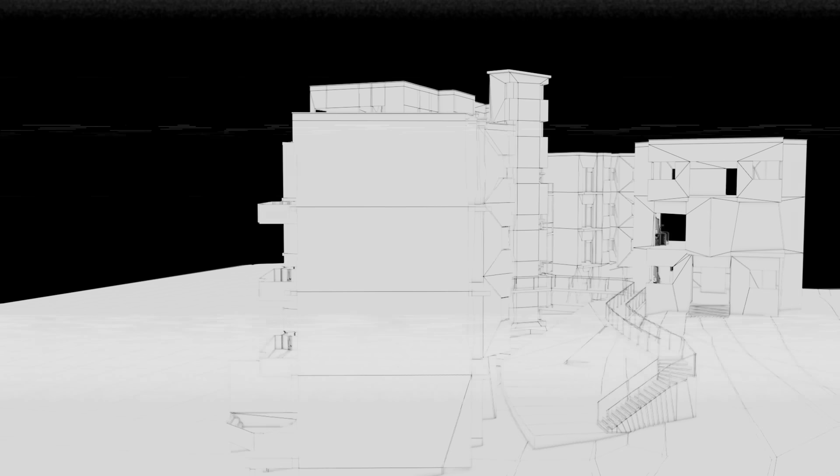I bought a plot of land many years ago for which I have ambitious plans. I've been on a property development journey ever since. Today I'm going to share each stage of the process, bringing us up to present day. But to do that, we need to go back to the very start.

I was born and raised in the UK. My family is St. Lucian. St. Lucia is a Caribbean island located between the Caribbean Sea and the North Atlantic Ocean. The capital is Castries and the population is currently 180,000. It's a member of the British Commonwealth and gained independence on the 22nd of February 1979.

Growing up, I was fortunate enough to visit St. Lucia many times as my mum wanted me to know where I was from and my family. I've been obsessed with construction and engineering my entire life, and my trips to St. Lucia were no different. I'd always try and work with my uncles in construction, agriculture, and haulage.

I started my construction business in 2006 in the UK, and in 2007, on a trip to St. Lucia, I inquired about land in the north of the island. Through a family friend, I was introduced to a gentleman who was selling this 1.7 acre plot you can see on my right, which is located in Bellevue Cap.

At the time, I had to stretch myself, but I managed to secure the plot for £120,000, which I paid for with a mixture of a deposit and a small loan. I wanted to pay back the loan, and my main focus was my business in the UK.

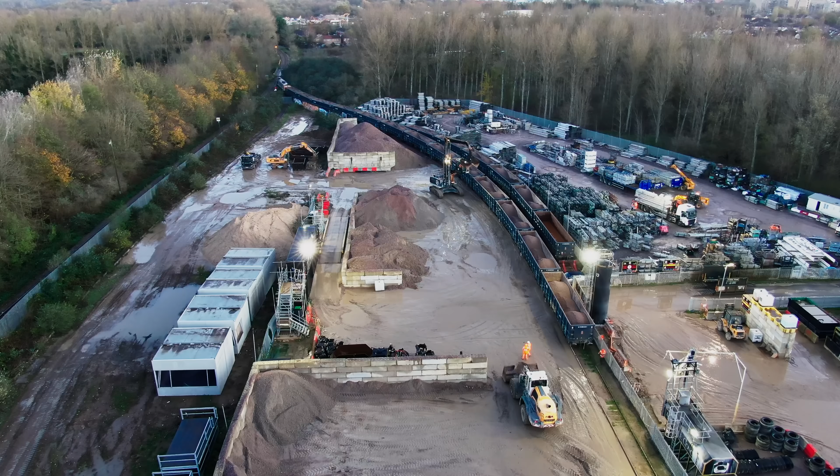So for a number of years, there were no developments here.

In 2009, the design process started, and there were two factors I had to acknowledge and take into account. Number one, the site isn't very big, and two, most importantly, it isn't seafront. So there was only one logical way I saw I could use the site to its full potential, and that was to get it as high as possible in order to create more units and give each of them a view of the sea. My construction experience is based on what I've learned in the UK.

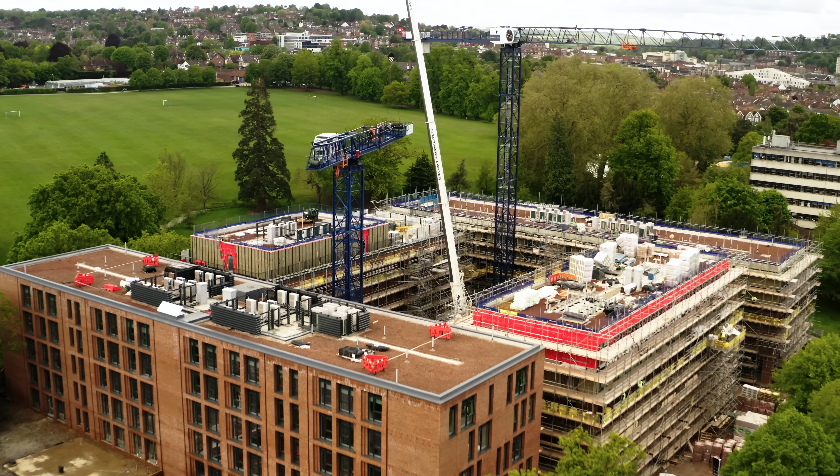But when building in the Caribbean, you need to take into account other factors which I didn't previously consider: storms, heat, sea blast. This is where the wind takes the salt from the sea and blows it inland and it rusts metal. The way around this is to specify stainless steel fixtures and fittings.

And finally, utilities. Unfortunately, in St. Lucia, from time to time, there are power cuts. We need to consider this in the build process and for the final homes.

I love concrete, I'm sorry, I can't help it, I do. And from day one, my concept for the development was modern and minimalist. I wanted to achieve this with open plan living spaces and white rendered walls, which would not be in keeping with the local architecture, which was colonial.

Rather than work against the terrain, it was decided that it would be easier to use the existing rock base and the levels of the land.

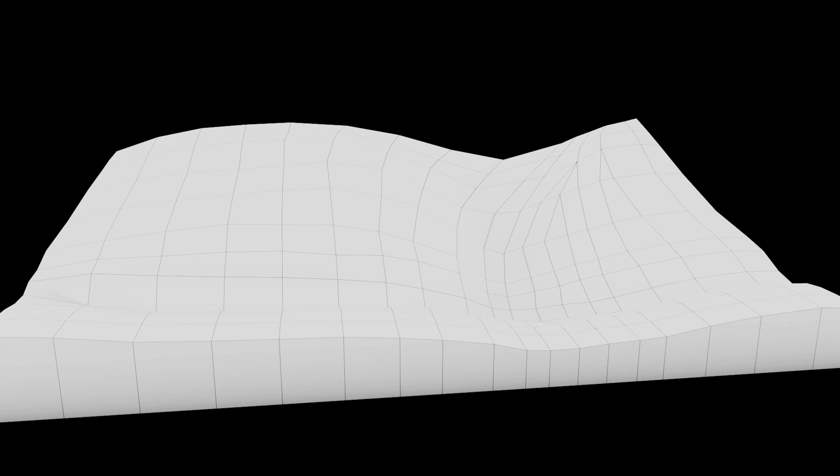I have always tried to convince my clients not to go with their crazy ideas, which cost a fortune to implement structurally. But this is my build. And against the advice of my team, in some areas, I decided on a stacked cube concept, which on each new level changed orientation.

It wasn't practical to do this in living areas, but we would implement it where we could with staircases and non-residential buildings. In my head, I had a clear vision for the residences, but the site itself needed a lot of manipulation to achieve the aspirations of the end product.

Now, when it came to the stacked cubes, I did not go with the recommendation of my team, but when it came to the lay of the land, I did take their recommendation. This is what I thought was required for each apartment.

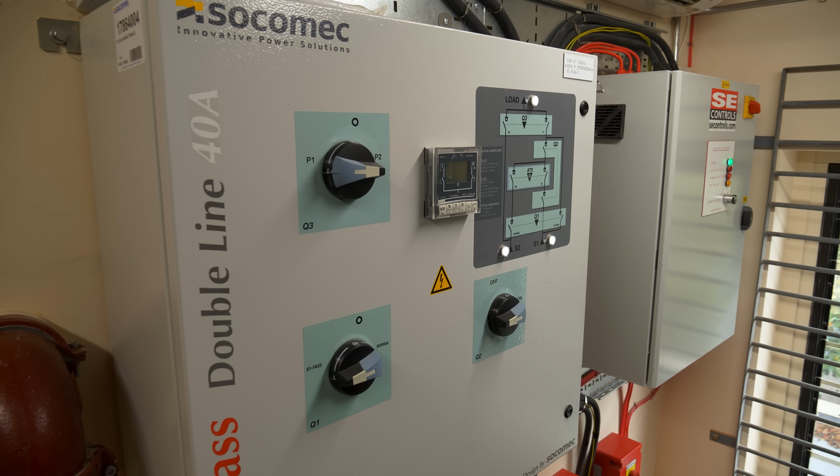Spacious rooms, high ceilings, and a light color palette give people a feel of space in a hot climate. Outdoor space and balconies, plenty of large windows and doors to let natural light in, a swimming pool, fully fitted state-of-the-art kitchens, luxury bathrooms, climate control, home automation, security, allocated parking, access to fitness and well-being facilities, backup power on demand in case of a power cut, and a concierge.

I've always wanted a home in St. Lucia, so I incorporated one within the development for myself and my family. With all this in mind, I approached a local architect and we began the design process, which went through a number of stages.

The first draft for the proposed layout had a reception building, 2 3-level apartment buildings, my home (the triangular-shaped building on the right), and a fitness and well-being centre with communal swimming pool, which was at the lowest point of the site.

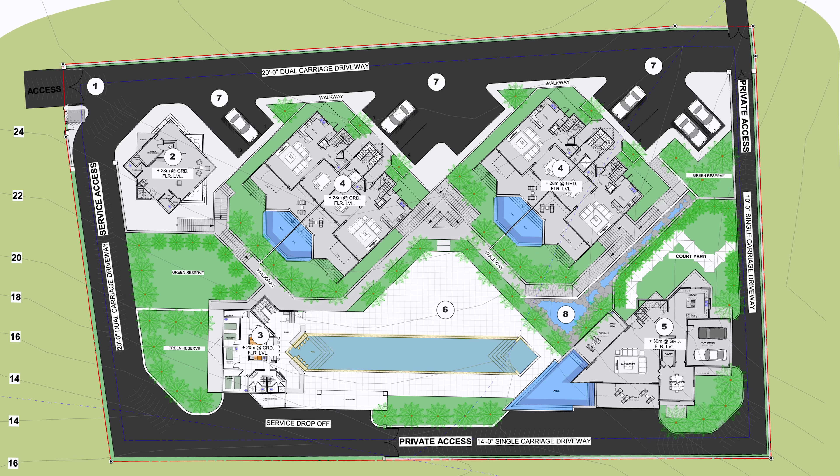To tackle the significant ground level differences, we used large retaining walls which doubled up as low-maintenance urban gardens. The apartment buildings were made of split-level townhouses on the ground and first floor, side by side, and one apartment on the second floor which sat over their entire footprint.

All the units had private pools, which were angled to have a view of the sea. In total, there were 4 townhouses, 2 apartments, my home, wellness facilities, and a reception building.

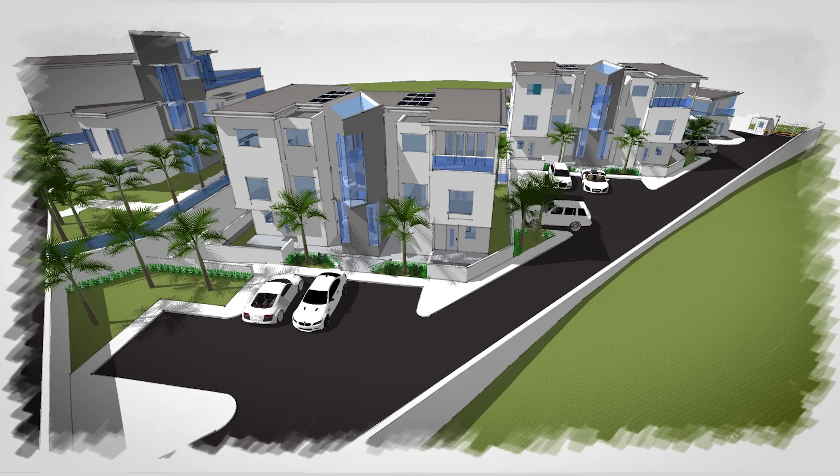Over time, we reviewed the proposed plans, and after a while, realized it wasn't the best use of space. There weren't enough apartments, my personal residence took up too much of the site, and the retaining walls would be extremely expensive to construct and maintain.

The wellness building would need to attract members from outside the development to sustain itself due to its size, and it simply wasn't high enough to capture the stunning views of the sea.

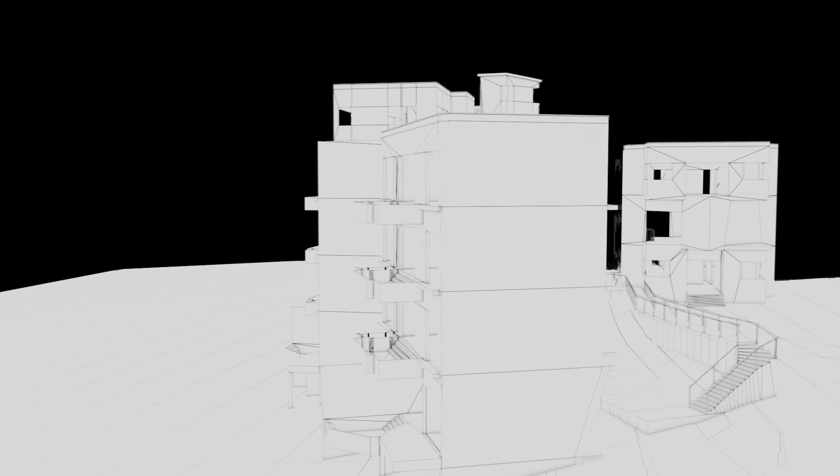So we went back to the drawing board in an attempt to fully utilize the potential of the site by deciding on the end goal and then reverse engineering to determine how we would achieve it.

We opted for 3 apartment complexes side by side with a mixture of units with floor plans which could be replicated and combined throughout the development.

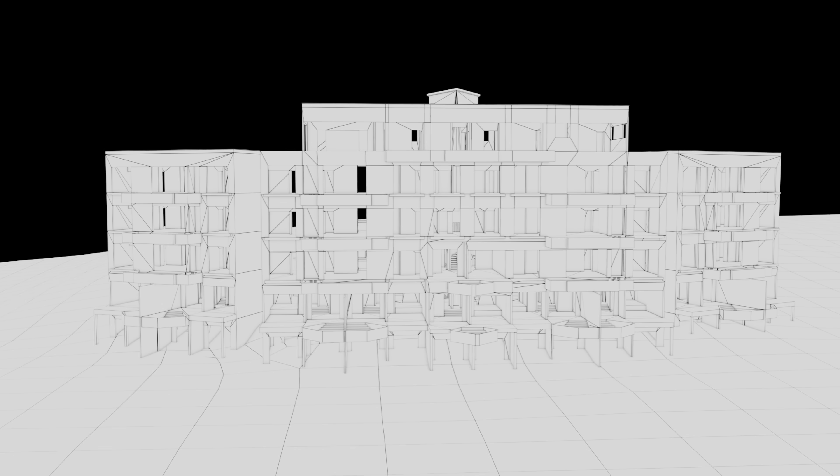The central building was 6 levels and the units either side 5 levels. This enabled shared structural walls to run through the multiple levels and save on costs, which was needed, as all the apartments, irrespective of their floor level, had private swimming pools.

Working with the natural slopes on the site, we accepted that the access roads would wind to ascend and descend, sort of like going for a nice drive on a mountainside.

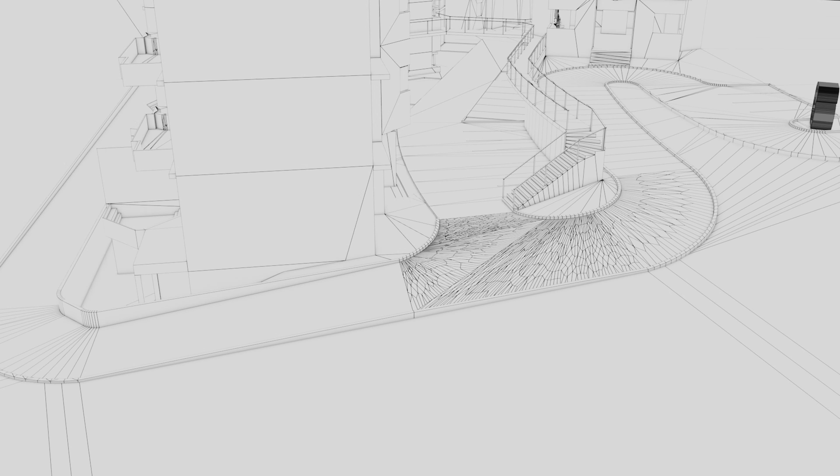I wanted to create an environment where everybody felt safe, supported, and had everything they'd expect from a luxury resort. So, inspired by the gated community concept, we put an 8-foot wall around the entire site, security gates, CCTV, a guardhouse, and a 3-level reception and fitness building.

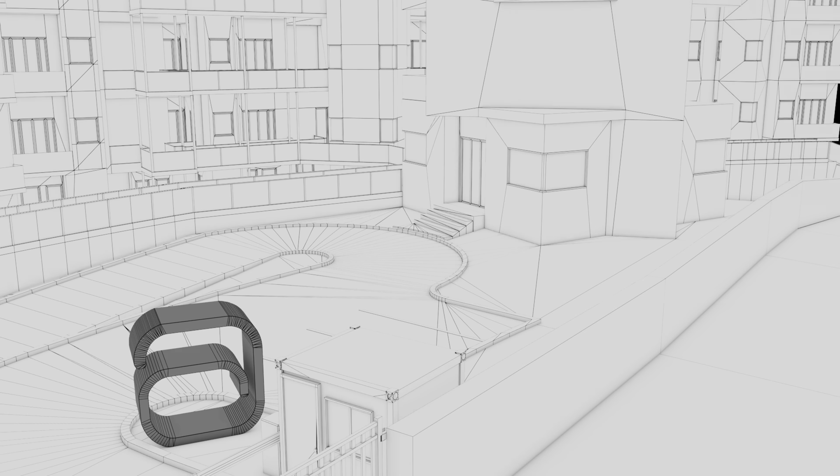It took time to get it right, but as I was self-funding this entire design process and had priorities elsewhere, the project wasn't time sensitive.

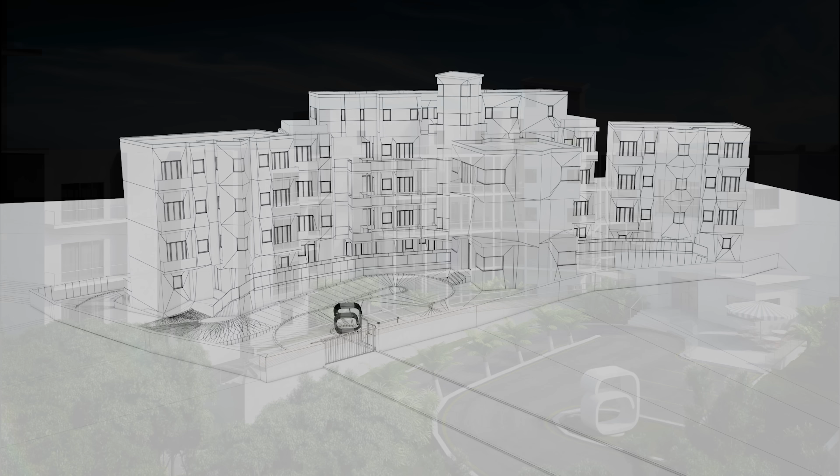Once the layouts were confirmed, the internal specification could take place. We went for modern lighting, large format tiles internally and externally, textured walls, and bespoke timber cabinetry.

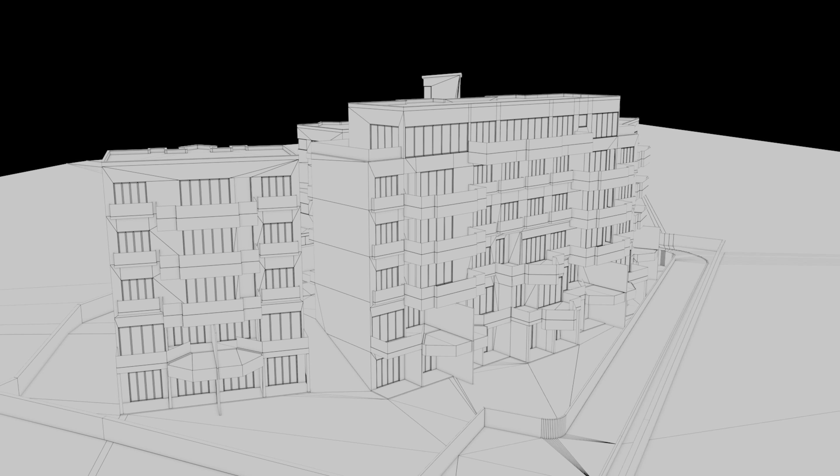At the end of the design phase, we had a scheme of 23 units. This was made up firstly, on the ground floor, of duplex townhouses, each 1,850 square foot with a flipped orientation.

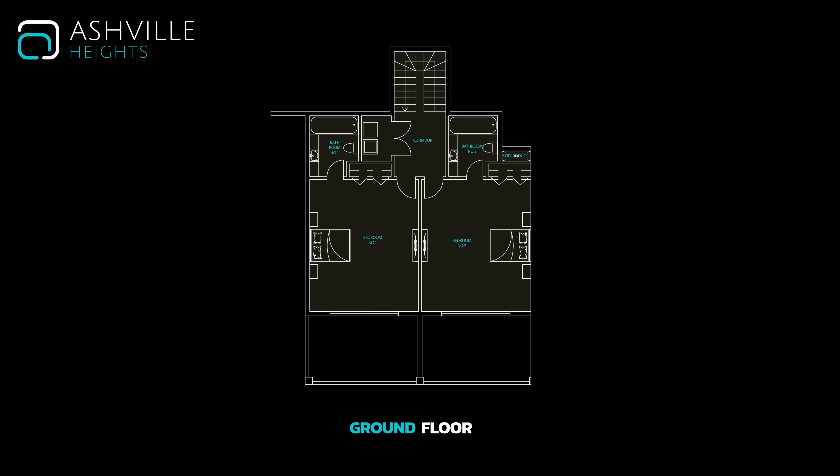On the ground floor, we had the bedrooms, and on the first floor, we had the living area and swimming pools, ensuring they had a view of the sea. Next, we had the 3-bedroom, 4-bathroom units, each 2,150 square foot. Then we had 4-bedroom, 5-bathroom units, which were 2,600 square foot.

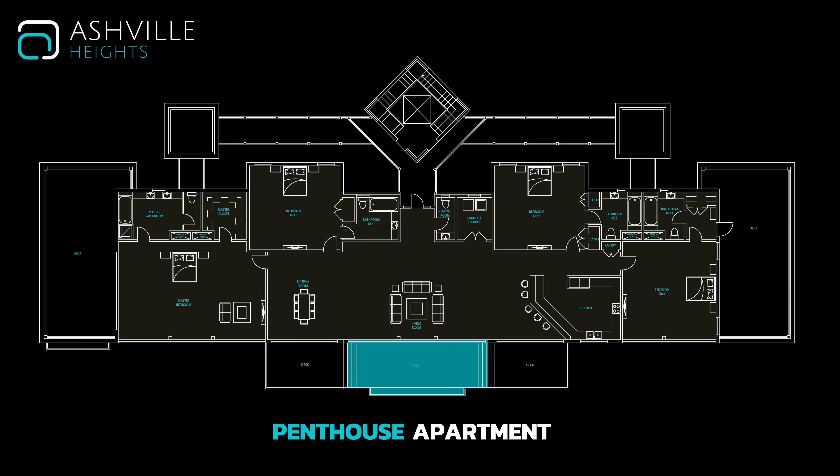And lastly, a 3,150 square foot, 4-bedroom, 5-bathroom, one-of-a-kind penthouse. And this, of course, was mine.

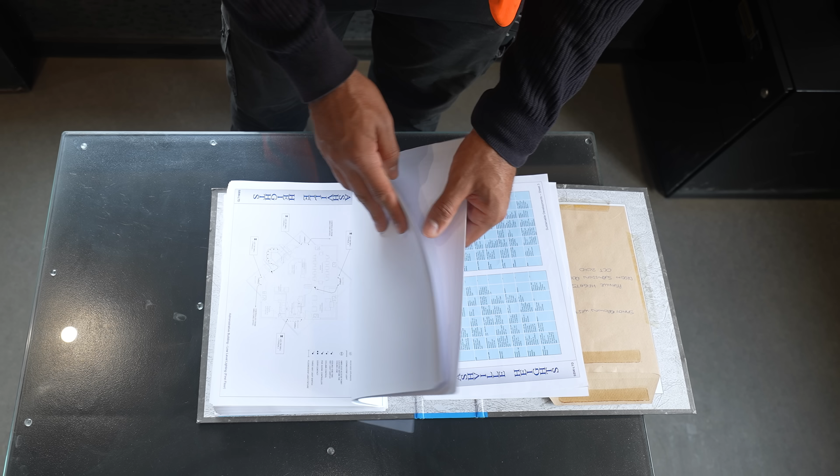My experience in the UK with planning did come in useful, but my team advised me on the finer details. We compiled a planning submission with architectural drawings, structural calculations and drawings, full mechanical and electrical plans, a fire risk management plan, and documentation describing how the site would impact the immediate space surrounding the proposed development.

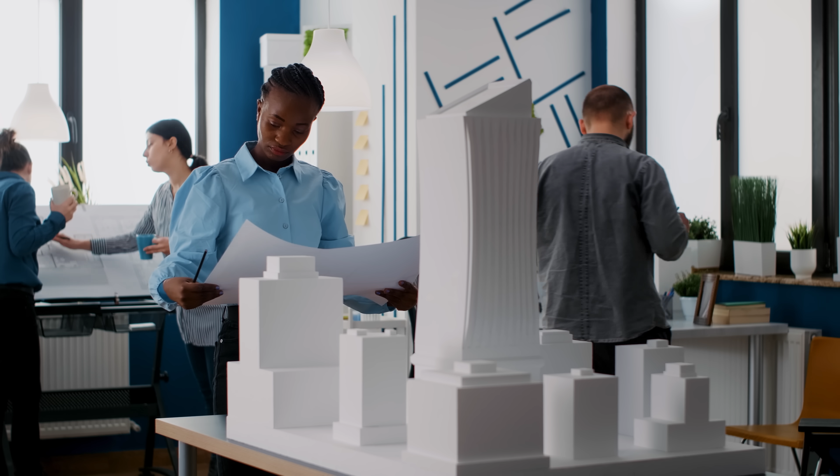Ordinarily, you would not submit this level of detail and information for planning. However, we foresaw this unprecedented development raising a lot of eyebrows and questions, so we approached with a preemptive strategy. After a not too painful planning process, which included a meeting with a government official to discuss the plans in depth, we got planning for the site in July of 2012.

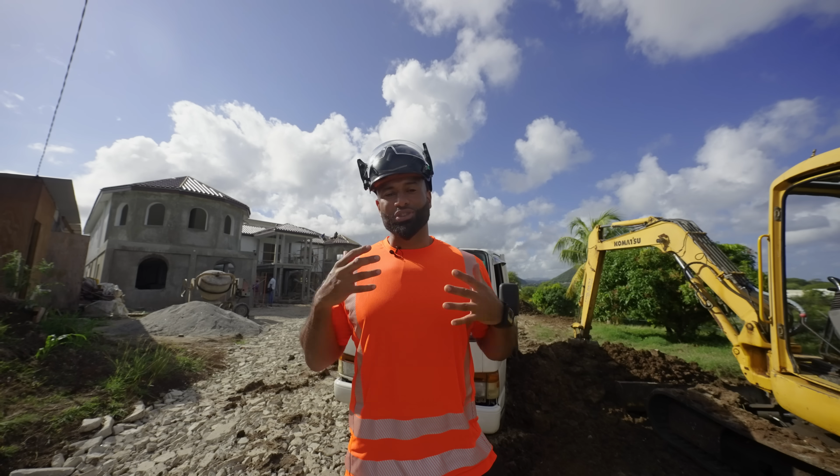It was now time to look at the build costs, and I decided a locally based quantity surveyor would be the best option. I waited till this stage to price the build because I feared that while going through the planning process there could be changes. This can happen as the planning department and local residents may have recommendations which the site needs to accommodate.

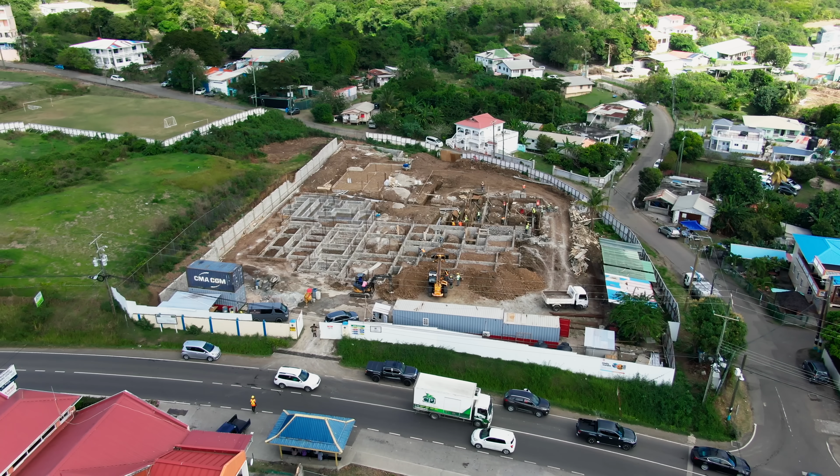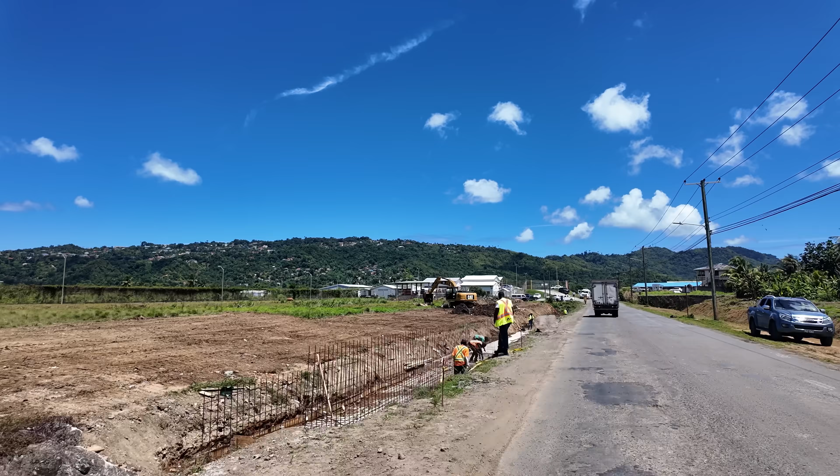With planning approved and a cost plan, it was time to do market research. We needed to identify who the potential buyers could be. It is key to ascertain the individuals or investment companies who fit the profile. The research pointed to local professionals, St. Lucians returning to the island, and foreign investment from British, American, European, and Canadians with disposable income in search of a second home in a tropical setting.

Now we know our target market, we need to develop a marketing campaign and strategically target them. The marketing for Ashville Heights has to be approached in two ways. Not only is the development in competition with other sites in St. Lucia, but also with other developments in the Caribbean as a whole. So I need to show potential investors and homeowners that St. Lucia is the island for them.

The St. Lucian Tourist Board is one of the most active in the Caribbean, with world-class telecommunication services, a stable economic and political environment, minimal taxes on resale of investments, no estate taxes, and no inheritance tax. A comparable purchase in Barbados would be 5 times the price. Those are some of the benefits about investing in St. Lucia. It's now about creating a marketing strategy to share all the benefits of investing in Ashville Heights.

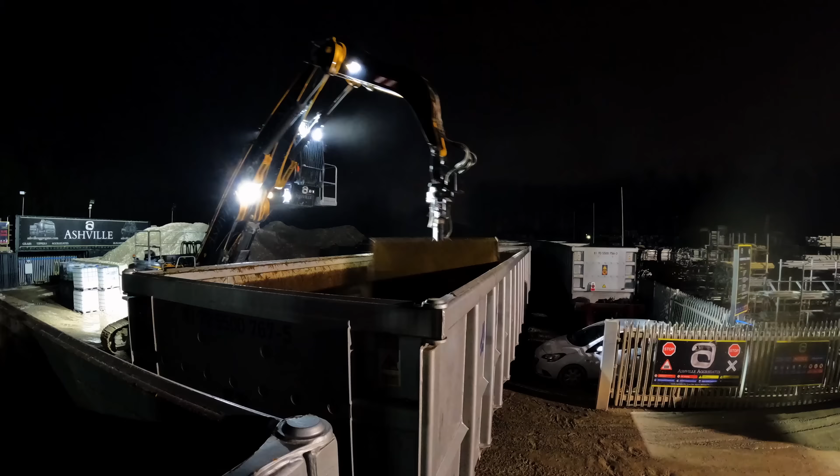Work stopped on Ashville Heights again at this point due to the intensity of my business endeavours in the UK. Fast forward to 2024, now I'm revisiting the scheme. The world is a completely different place.

I feel that Ashville Heights and myself are out of touch, so I decided to sit down with a local real estate agent and a personal friend of mine who also happens to be a high-end design and build, hotel and development contractor. Do you think it's a problem that the site itself is only 1.79 acres?

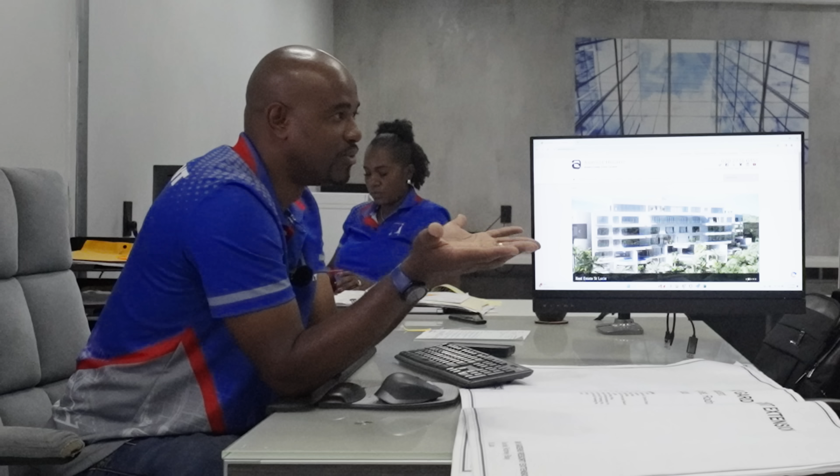That's a massive site. You're going up, so you're doing the right thing compared to some developers that I see. They try to spread prime real estate thin. I don't think it's just a St. Lucian problem, but I think prime real estate around the world is getting slimmer and slimmer as the days go by. So what do you do? You can't keep spreading horizontally, you have to go vertical.

Every unit has its own swimming pool. The cost to have a swimming pool at that height, the structural work that's going to need to go into it, that may make your cost a little bit prohibitive. If clients wanted that pool up there, you give them the option of purchasing it prior to, rather than asking somebody to pay probably—and I'm just shooting figures out—but probably 75 grand extra for a pool up in the air. You might as well put a communal pool and give them that option instead.

Knowing the Ashville site, you do get a view from almost any floor you will be on. It's very hard for me to tell because it's all overgrown at the moment, but I went there, and from the ground floor, you do have an ocean view overlooking Pigeon Island.

Does there need to be a helicopter landing pad on top of this? Is there a trick that I'm missing here? The quality of your actual build and the quality of your fixtures, fittings, and appliances.

So what kind of tile you have on the floor, the type of doors, the types of windows, your air conditioning, the countertops, your cupboards - all those things will play an integral role. That will differentiate whether you're high-end, mid-end, or low down the line.

And for where this development is positioned, I think definitely it begs, it calls for a very high-end type of build. However many levels it is now, it will have to grow, planning permitting, to make the building a lot taller. In your experience in planning, in an area like this, looking to go higher, do you think that's a problem? No restriction.

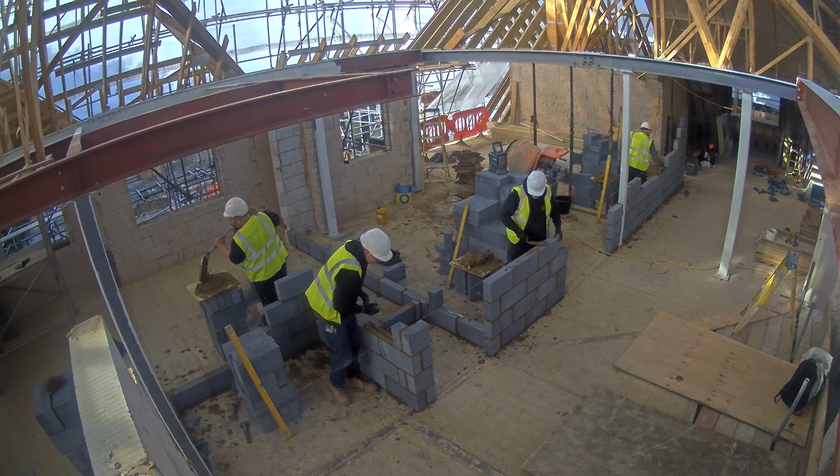Would you suggest building this in steel and having concrete formwork, or just pouring everything in concrete? I would not recommend just pouring everything, because a solid pour doesn't allow you flexibility in the future. So I would recommend blocks and drywall on the inside for your internal walls within one unit. There are separating walls which will separate unit A from unit B - that can be solid filled, giving a lot more flexibility, faster, cleaner, a more high-end, pristine looking build.

I guess it's time to go back to the drawing board. Perhaps we can work on it together and see how we can alter the scheme to make it work. Yeah, oh man, much appreciated, Kurt. No problem, sir. Thank you.

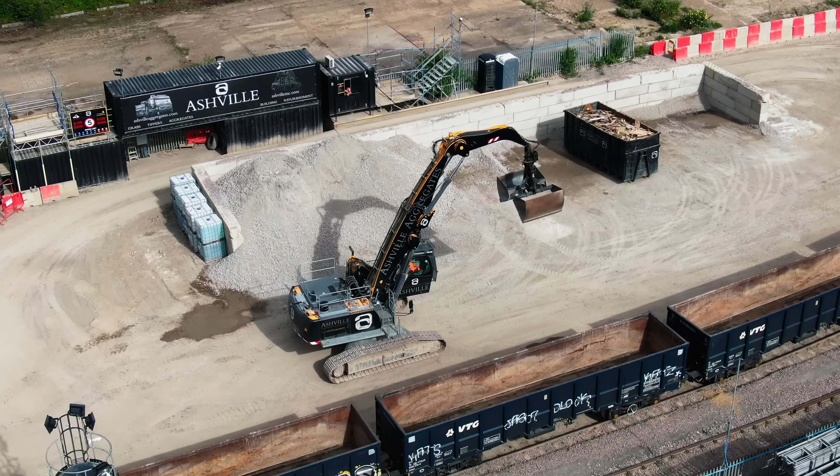So we are at a point where I need to decide what to do next, and there is a lot to consider. Priorities have changed since the purchase and planning, which has cost me, but currently the site hasn't acquired any debt. Is it worth selling with planning and putting a cash injection into my business pursuits in the UK?

But I do want a home in St. Lucia, so maybe sell with planning and find another suitable plot for my personal home. If I do build it and all goes according to plan, do I want the responsibility of managing and operating a site like this on completion?

The current market and global economic climate is currently uncertain. If I build, even with a fantastic marketing team, will they sell? And if mid-build there's an economic crash, will the debt be recalled? But there's a general view that the market will improve. If I build in 2 years, will I have the benefit of a general market rise?

And I need to look outside the development. What are buyers' options? It's all about supply and demand. If there are more units available than people are buying, it becomes a buyer's market and prices are driven down. Have I alienated and narrowed my market, building a high-end luxury development in this location?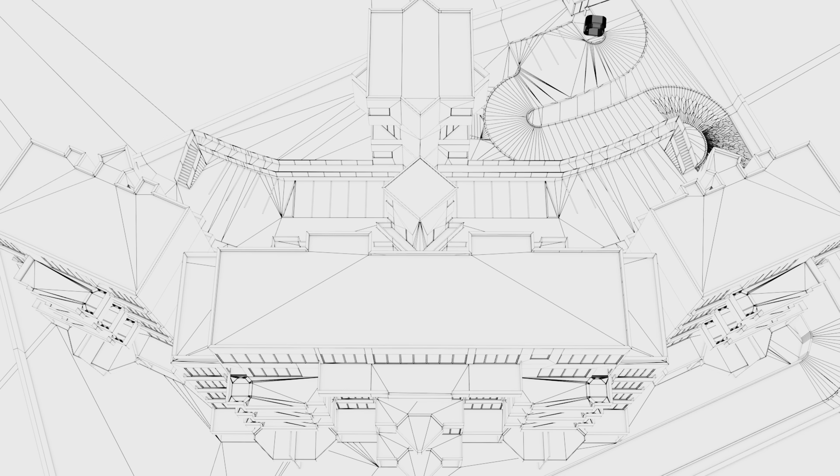Should I scale back the development and make it more manageable? Or should I go for it and make it even bigger? As the site becomes bigger, the cost per square foot reduces, and then we can sell at a more competitive rate in the local market.

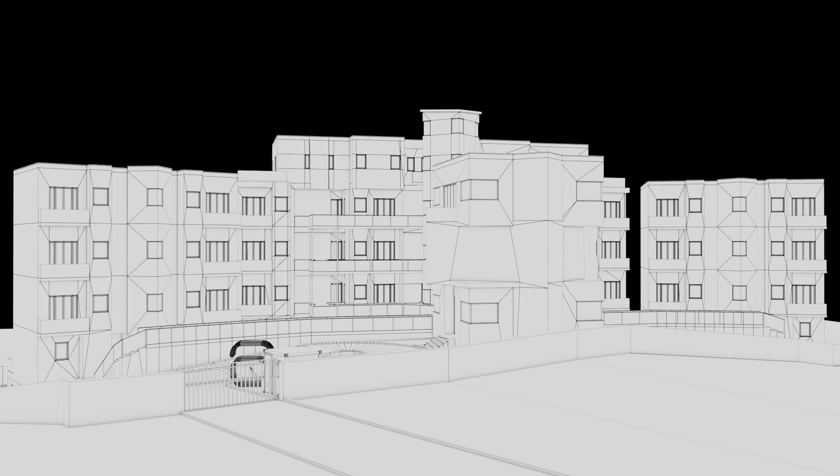Fortunately, we have a good reputation in the construction industry, and there are financial institutions who want to fund the development. But just because they want to fund it, does that mean I should take on the debt? Are my valuations accurate? And is it possible to be accurate?

In the Caribbean luxury market, there's a saying: the property is worth as much as someone's willing to pay for it. I am confident I can make it work and be a success. But just because I can, that doesn't necessarily mean it's the right decision to make.